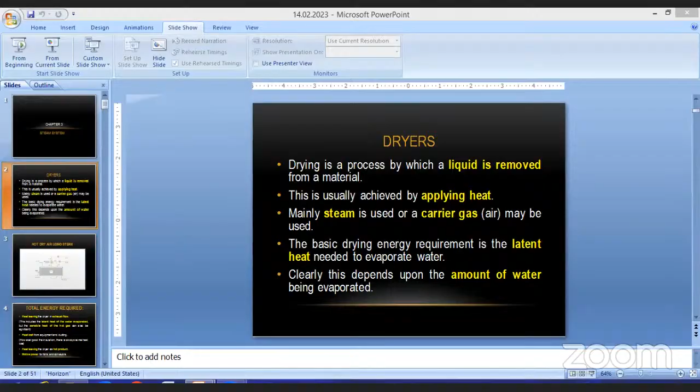So drying is a process by which the liquid is removed from a material. Normally this is done by applying heat, and mainly steam is used as the working fluid here. Sometimes we use a carrier gas; it may be a flue gas. So the basic drying energy requirement will be the latent heat. Already in the previous class we have seen what is latent heat and what is sensible heat.

Here the majority of energy consumption will be the latent heat, because there will be a phase change into the vapor phase. Another parameter we have to consider is the amount of water being evaporated, because the latent heat will be equivalent to the mass of the moisture to be evaporated into the latent heat. So M is the main factor we need to calculate in the drying process.

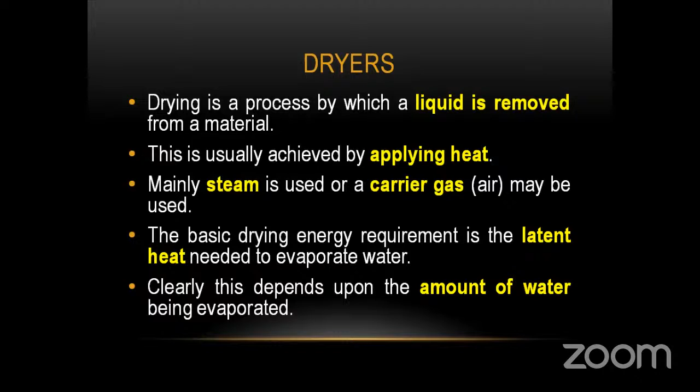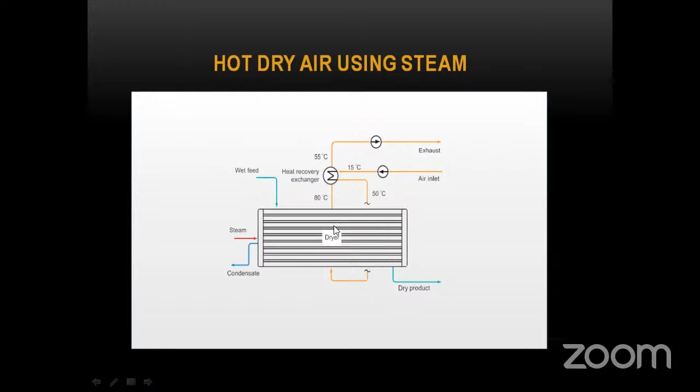This shows how to heat dry air using steam. This is basically a heat exchanger where you send in the steam for exchange of heat, and it leaves as condensate. The air enters at a lower temperature, gets the heat from the steam, and turns out to be hot air. When we need to find the total energy required, these are the heats we have to take into consideration.

First is the heat leaving the dryer in the exhaust flow. That includes the latent heat of the water evaporated and also the sensible heat of the hot gas. The sensible heat is M Cp into delta T, and that may also be significant sometimes, so it also needs to be calculated. Second is the heat lost from the equipment and ducting. Even though we provide good insulation, there will always be some heat loss, so that also has to be taken into consideration.

Third is the heat leaving the dryer as the hot product, that is, the heat gained by the product. And last is the power spent for the fans. In order to deliver the heat energy, what is the auxiliary consumption? That also has to be taken into account.

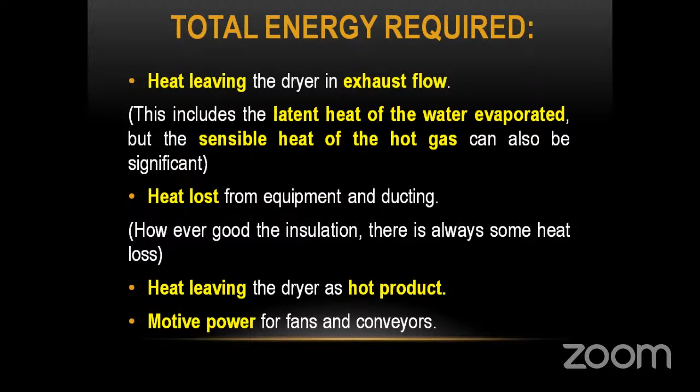So these are the major common factors resulting in the excessive energy usage. So we need to check all these factors while we are designing a drying system. Sometimes the drying load may exceed beyond our design. Sometimes the exchange of heat, the airflow may be excess.

And the third case may arise, the hot exhaust flow may be unnecessarily there. And leakages will be there, that we call the hot air leakages. And due to poor insulation, there may be some loss. And in the worst case, sometimes if the proper design is not there, the fan power used will be more.

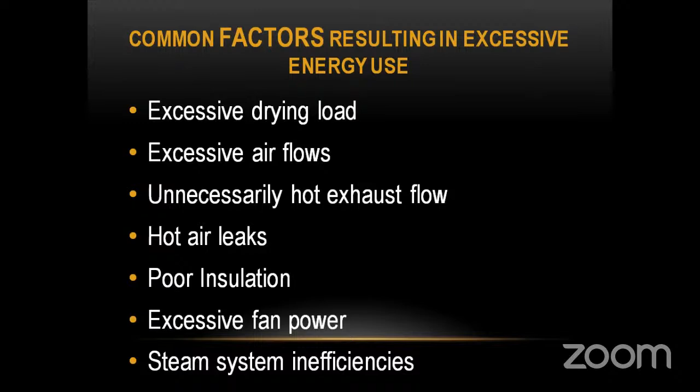So excessive fan power will be directly proportional to the efficiency loss, because the heat will not be taken by the other fluid due to the excessive power. So all these are the steam system inefficiencies. So these have to be considered at the design itself.

So we'll work out one problem in heat energy in air drying. This type of problem is asked in the university questions in our energy audit also. So if you have your notebook, kindly take it. You can also have your calculators, please. First, we'll read out the problem.

A food containing 80% moisture is to be dried at 100 degrees centigrade down to a moisture content of 10%. If the initial temperature of the food is 21 degrees centigrade, calculate the quantity of heat energy required per unit weight of the original material for drying under atmospheric pressure.

The latent heat of evaporation of water at 100 degrees centigrade and at atmospheric pressure is 2257 kilojoules per kilogram. The specific heat capacity of the food is 3.8 kilojoules per kilogram degree Celsius, and of water is 4.186 kilojoules per kilogram degree Celsius. Find also the energy requirement per kilogram water removed. So this is the problem given.

First of all, when we are given a problem, we need to read the problem and write the given data. So in the first statement, it is given a food containing 80% moisture is to be dried at a temperature of 100 degrees centigrade, down to a moisture content of 10%. So we have to interpret the given data in terms of numbers. So initial moisture is 80%, which means 800 grams moisture is there, which is associated with 200 grams of dry matter.

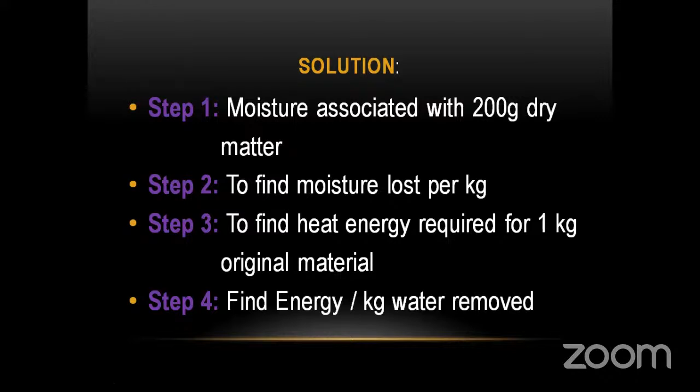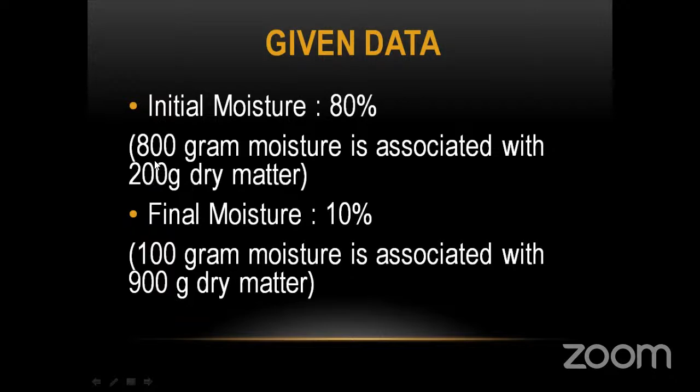So step 1 will be to find out the moisture associated with 200 grams of dry matter. So why is it 200 here? It is because of the given data. So step 1 is moisture associated with 200 grams of dry matter, which is equivalent to 100 by 900 into 200. The reason is here: this is 100 grams per 900, and for 200 grams we are going to find out. So by calculation, it is equivalent to 22.2 grams of moisture. So this much moisture is associated with 200 grams of dry matter. So this is the first step.

And we move to the second step. This is a very important step because we need to find out this M. When we multiply this M with the latent heat, we'll get the heat of evaporation. So 1 kg of original matter has to lose moisture down to 22.2 grams. So it is 800 minus 22.2 grams of moisture, which is equivalent to 778 grams of moisture. So the mass in terms of kilograms is 0.778 kilogram of moisture. Then step 3.

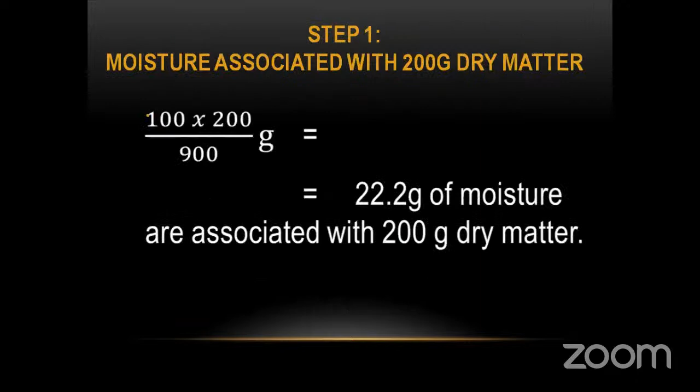To find out the heat energy required for 1 kg of original material, which will be equivalent to the summation of two heats. One will be the sensible heat, that is the heat energy to raise the temperature. Initially it is at 21; the temperature is given in the third line. The initial temperature of the food is 21 degrees centigrade, so we need to heat it till 100 degrees centigrade is reached.

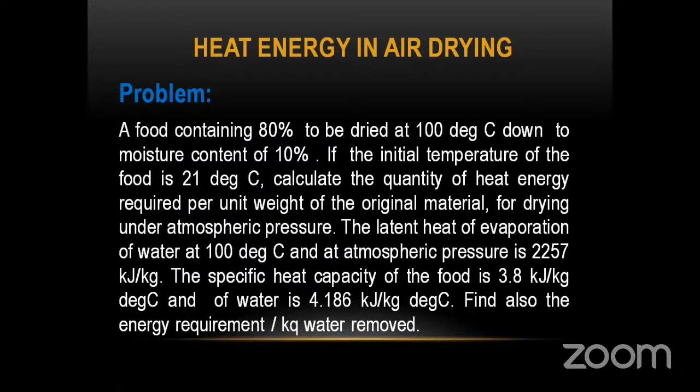So the sensible heat added will be again by the same basic formula of mCp del T, where Cp is the specific heat of the food. It is given in the problem itself: 3.8 kilojoules per kilogram degree Celsius. T1 is the highest temperature, 100, and T2 is 21 degrees centigrade. We are calculating for 1 kg, so mass is taken to be 1 kg. So QA, if you multiply, is 300.2 kilojoules. This is the sensible heat utilized.

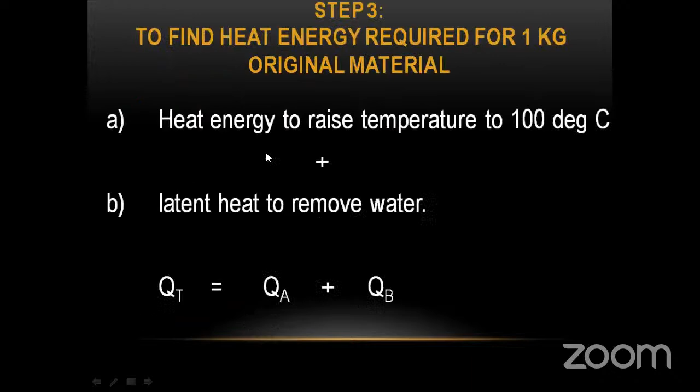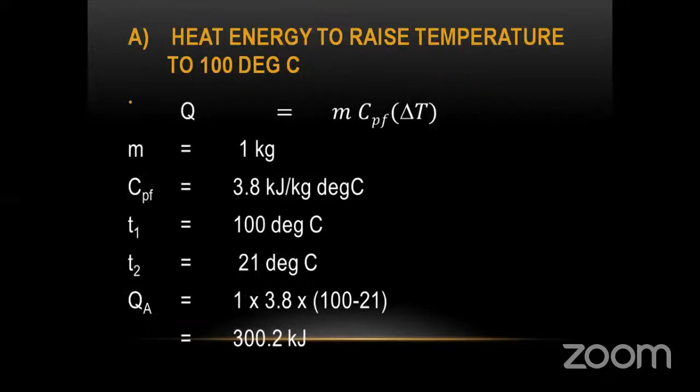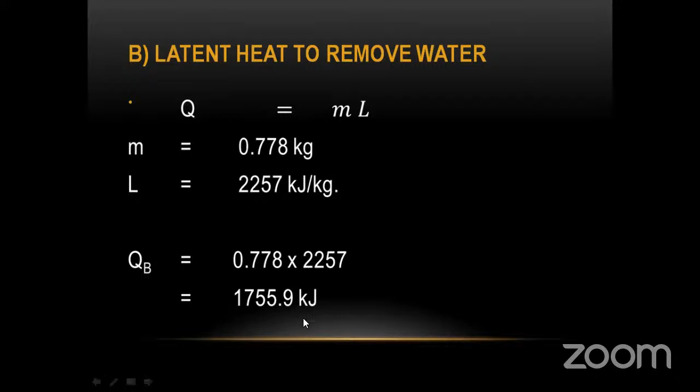The other heat will be the latent heat required to remove the water. This is given by mass into latent heat of vaporization. The latent heat of vaporization is given in the problem as 2257 kilojoules per kilogram, whereas mass is the moisture we found in step 2. At the end of step 2 we found 0.778 kg of moisture. We use it here to calculate the latent heat to remove water, which comes to around 1755.9 kilojoules. So the total heat energy will be the addition of the two.

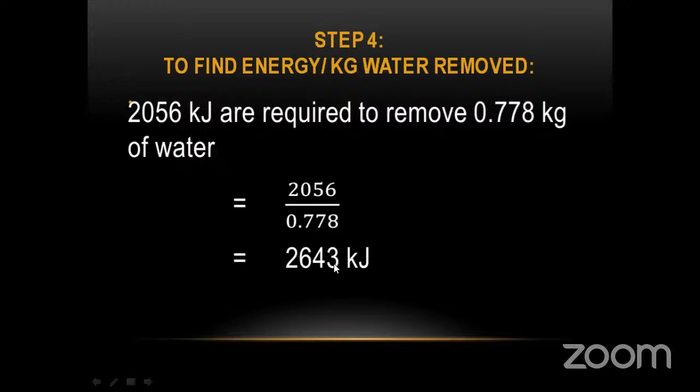And the final step will be to find it per kg. Here 2056 kilojoules have been arrived at, required to remove 0.778 kilogram of water, so what is the energy per kg? That is the final question asked in the problem. So we divide it by mass, and 2643 kilojoules per kilogram of energy requirement is the final answer.

So this is one lengthier problem, but similar problems have been asked in the questions. If a problem is given like this, we need to read it, write the given data, and arrive at the various steps. Then substitute one by one, and we will get the final answer. It will be the addition of sensible and latent heat only, but we have to put the terms in correctly. Shall we go to the other topic, sir?

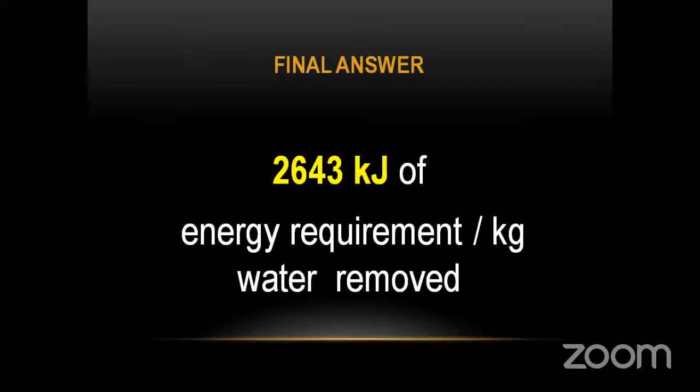Yeah. So the other one is the proper selection, operation, and maintenance of steam traps. In the last class, we had seen what a steam trap is and its purpose. In order for the efficiency to hold good, we have traps to let off the condensate, any air, or any non-condensable gases present in the steam. Otherwise, condensate will form inside the pipe, which will reduce the temperature of the steam, and ultimately the efficiency will go on decreasing. Based on that we have also done one problem. I hope you can recall it.

In the previous class, we worked out how much the temperature is reduced if an amount of air is trapped inside. So the purpose of the steam trap is to obtain fast heating of the product and equipment by keeping the steam lines and equipment free from condensate, air, and non-condensable gases. And what is a steam trap? It is a simple valve device which will discharge the condensate and the air without discharging the steam. That is the highlight of the steam trap. If steam is lost, then our total system will collapse.

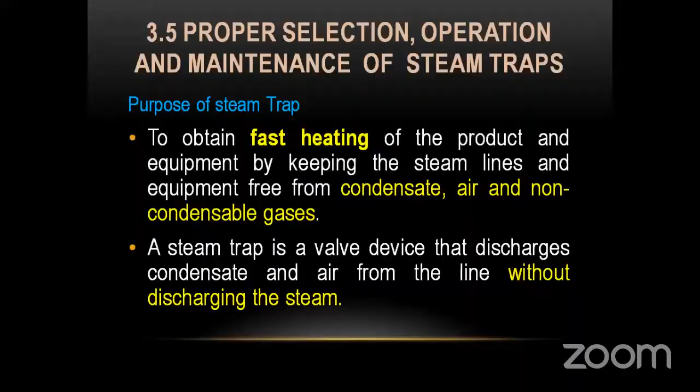Sir, is there any net problem? Please stay in, sir. There is some net problem. I'll again reconnect.

And the second function was not to allow the steam to escape. And the third one is it should be able to discharge the air and other non-condensable gases then and there. So these three are the main important functions of the steam trap.

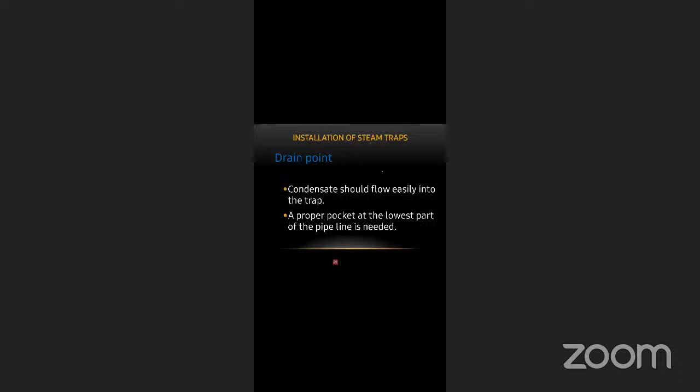The other topic is the installation of these steam traps. How to install these steam traps? What are the main criteria we need to follow during installation? In order to have a trouble-free installation, careful consideration needs to be given to the following. The first one is the drain point. At the drain point, the condensate should flow easily into the trap. Otherwise, there will be some pressure drop. So we introduce a proper pocket at the lowest point of the pipeline. That is needed.